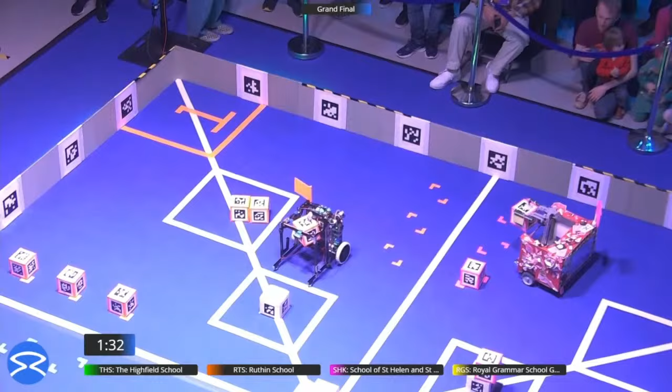That did not transition. Now it did. Fantastic. So that's a lot to do.

Starting from today, you've got about 5-ish months to design your robot. You're going to want to build some kind of rough and ready prototype. You're going to need to build it. The material choice is entirely up to you. You're going to want to style it to make your robot look great.

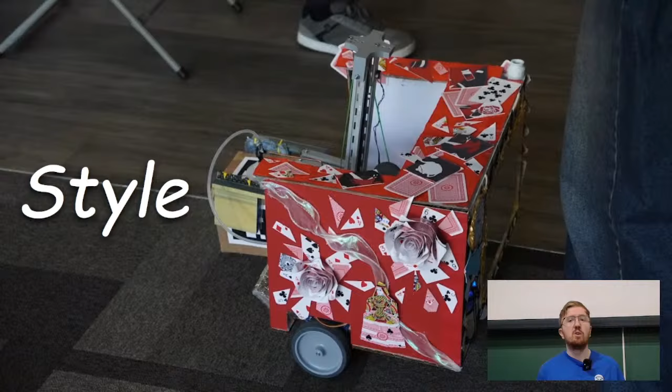Like this one from last year. Yes, that is a mirror on the back of it. You're going to do some electronics, hopefully slightly better than this.

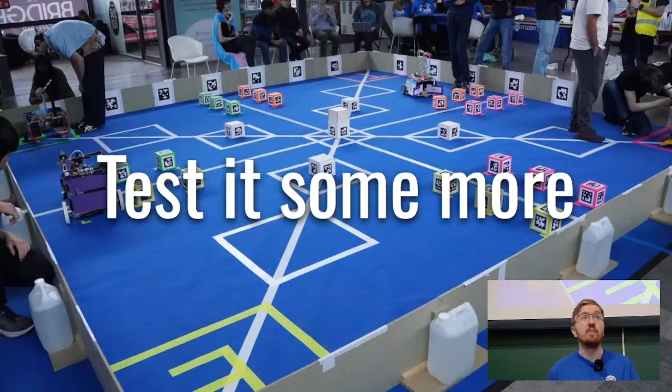You're going to write quite a lot of code. You're going to test your robot, and test it some more, and test it some more. I can't emphasize enough how important testing is. You're going to make some adjustments. Hopefully it won't be using a hammer, but you never know. It won't be perfect first time, and that's okay.

You're going to work as a team. You're going to get your robot inspected. You're going to compete, compete some more, and compete even more. You're going to be doing a lot of competing in a lot of matches throughout the course of this competition.

Your robot is going to meet other robots, and you'll meet other robots. You're going to meet quite a lot of other people. Like I say, there are 30 teams competing this year. You will hopefully score some points, and hopefully win some prizes. Above all else, have fun. This competition is about learning, having fun, and building the best robot, in that order.

So what could your robot look like? We talked a lot about what you have to do. Let's dive into talking about what your robot could do.

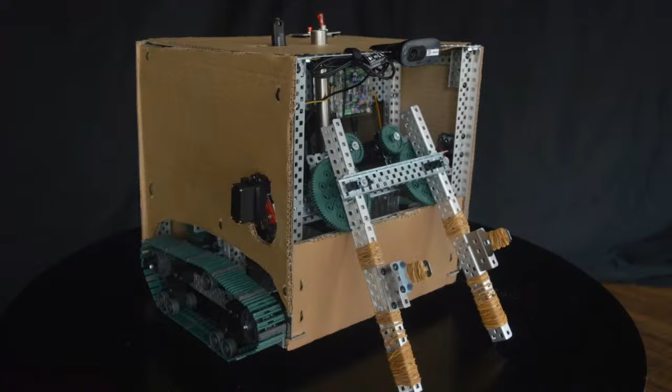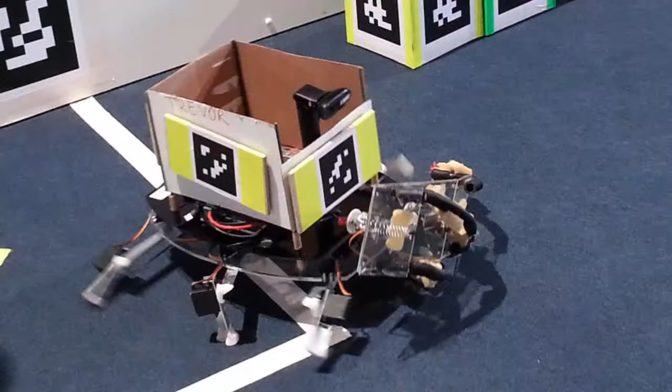The objective is to build a robot, and as many of you know, robots come in lots of different shapes and sizes. Some look like boxes. Some look quite intricate. Some look like that. Some look like cars. Some look like car washes. Some look like spiders. Yes, those are legs. John, I'm sure you're watching. And really anything else. The only limit is your imagination and our rules and health and safety.

So let's talk about a couple of design tips.

Yeah, I don't know what Apple were thinking, really.

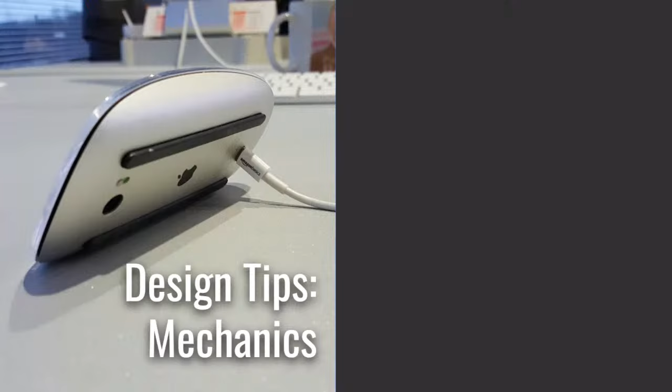I'll give you some tips about your design, hopefully better than a trillion-dollar company. Above all else, read the rulebook for this year. It's incredibly useful. You're going to need to think about how your robot is going to move. Is it going to have wheels or tracks or legs if you're John Bartlett?

If you've got exposed mechanisms, you want to make sure that those aren't going to get caught on anything. Servos are really useful for precise movement, but they're not going to be very good for actually driving unless you're using legs. You can't hold two bits of, say, wood together and hope that they'll magically fuse. You need to think about how that's going to work. Is it going to be glue, nails, screws, things like that?

Robots come in all shapes and sizes, as we've seen, but they still have size constraints in the rules that you're going to need to adhere to. And you can't build things with tools that you don't have access to. If your entire robot is built around a 3D printer and laser cut ply, and you have access to neither, you're not going to be able to build your robot. You are going to need to think about what tools you have available to you, whether that's personally or through your school's design technology department.

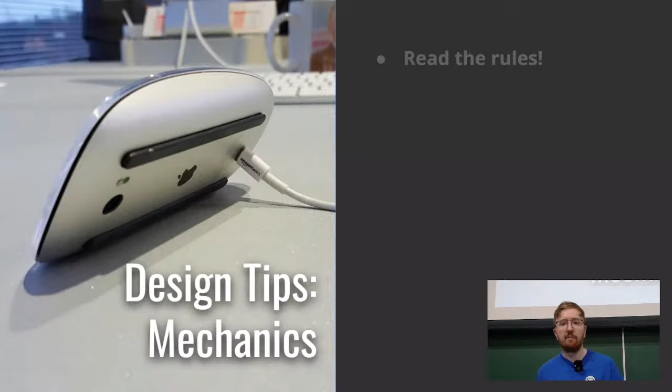Oh, I should have been hitting the button while I was talking. There we go. Autonomous robots need to be aware of their environment.

Like we say, this is an autonomous robotics competition. You press start and then the robot does its thing. There is no additional input. So you're going to need to think about what kinds of sensors you're going to be using, whether that's vision using a camera, whether you've got bump sensors, light gates, potentiometers, rotary encoders, accelerometers, gyroscopes, time of flight sensors, and many, many more. There are lots of different sensors that you can use with our kit. You just need to know how to actually do it. They all have their merits, and you want to make sure you're using them in the right places. But they're not good at everything all of the time. They have different trade-offs.

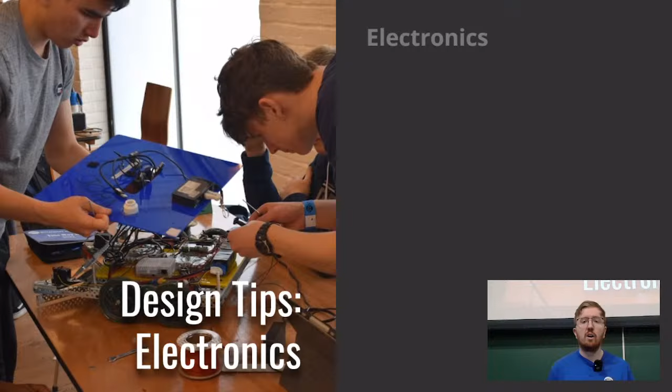So along with sensors, you are going to have some electronics. You're going to need to work out where they actually go. Your robot, you don't really want to just be a spaghetti mess like the picture that we showed earlier. I can say that because I built that robot. You need to think about how you're going to use the sensors. Can you actually interface them with our kit? The answer is probably yes, but you're going to need to work out how. How long should the wires be? How are you going to get power and data between all the different parts of your robot?

You want to make sure that the start and stop button is easily accessible. If your robot is driving across the room as fast as it can, you want to be able to very easily turn it off. Again, yes, I have had to run after a robot and try and kill it.

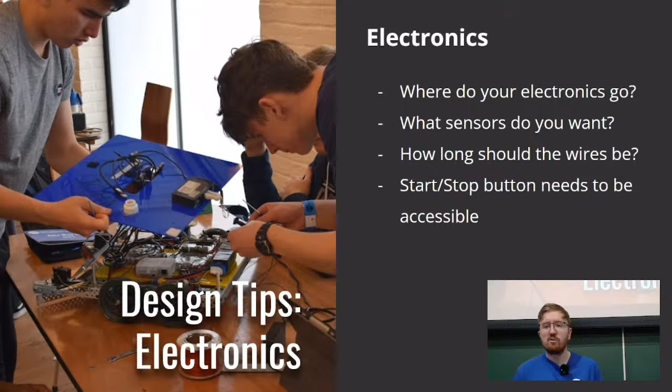You're going to need your USB stick. Your USB stick is going to have your code on it, that's going to be plugged in, but you're going to need to make sure that that is accessible. You're going to have one USB stick for your code and one USB stick, which we'll provide at the competition, which tells your robot which area it's in. And of course, your robot is going to be powered by some kind of battery, and you want to make sure it's protected. More on that later.

So, our super high-end kit. We want to help you out by building your robots as much as we can. We're not sending you in empty-handed. Hopefully you should have received... yes, we're going to give you a kit. It's going to have a lot of useful things in it.

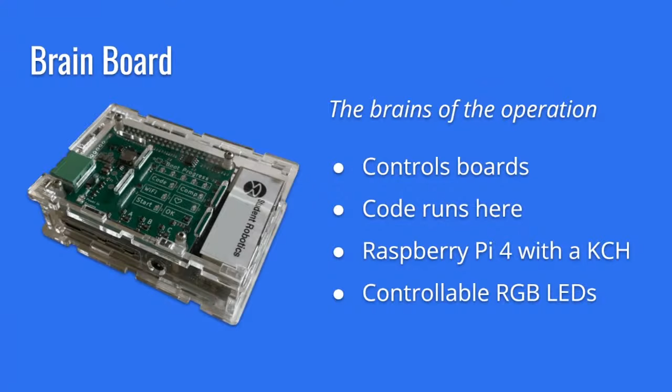The brains of the operation, as it were, is the brain board. It looks very similar to a Raspberry Pi 4, and that's because it is a Raspberry Pi 4. This is where your code runs, and this is what controls all the other components of your kit. There's a little thing on top of it, which we call the KCH, a little hat, which has a bunch of nice fancy LEDs on it. And because it's 2025, some of them are RGB. This can be really useful for debugging and understanding what your code is doing, and also what the robot is doing as it turns on, to work out exactly why something's not working.

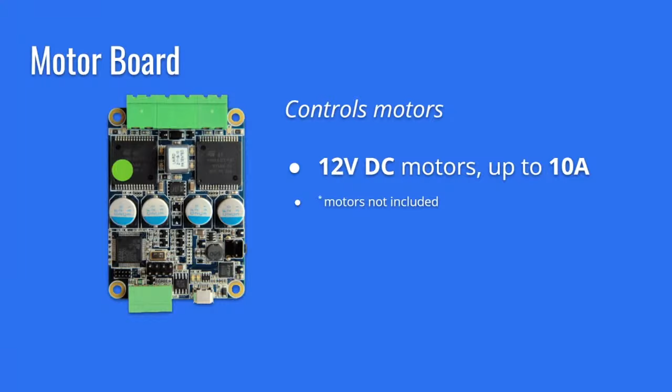The motor board, very aptly named, it controls motors. Each motor board can control up to 2 motors. You get 2 motor boards in your kit, so in total you can control up to 4 motors with our boards. If you want more motors, you'll need to source your own controllers yourselves. There are no motors in the kits. Sourcing those is up to you, but the docs can help you to work out what kinds of motors you need and which ones are good. The motor boards themselves control 12-volt motors, so you will need to buy 12-volt motors. If you put a 5-volt motor into them, they will get very unhappy. The motors will get unhappy. The boards will be fine.

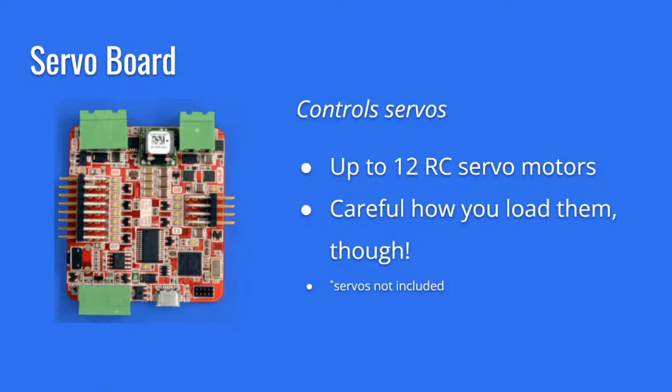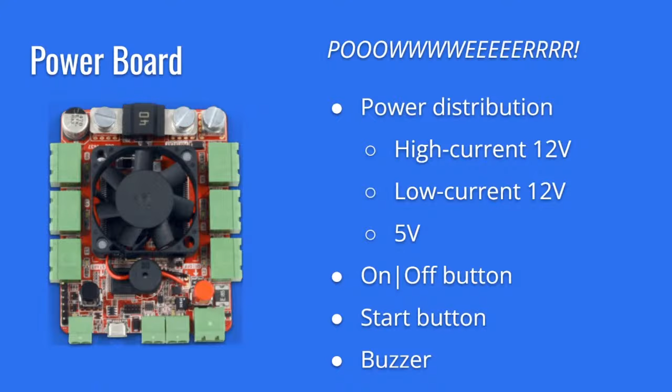Speaking of the battery, it should be treated with respect. They are fairly chunky things, and there is quite a lot of power contained in one. We generally say, as a rule of thumb, the amount of energy contained in a fully charged LiPo battery is about the same as you'll find in a hand grenade. They are incredibly good at powering a robot, but that means if you stab them, they are incredibly good at setting on fire. So don't stab them, so they won't set on fire.

You do not want to connect these batteries to anything other than the power board that we supply and the charger that we supply. They should not be plugged into anything else under any circumstance. If you're unsure and have any questions, please contact us as soon as possible so we can answer them. If you're just interested in batteries and stuff, ask us as well. It isn't just about us being boring.

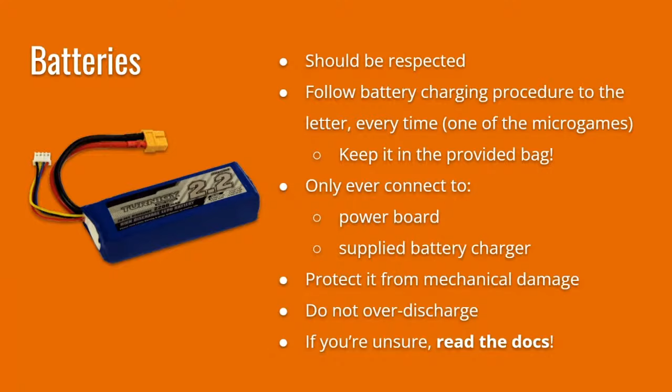On top of the Pi, you will have seen there is a hat. That means the GPIO pins you would generally find on a Pi are not accessible. So instead we provide an Arduino. This provides general purpose I/O, or GPIO, very similar to what you'd find on a Raspberry Pi, but with a few extra benefits. These will do analog, digital, and PWM pins. There are many uses for that kind of I/O. Lots of the sensors I mentioned earlier will need to connect to some of these pins.

We ship them with stock firmware that will nicely talk with the rest of our kit, but if you would like to write completely custom firmware for these, you absolutely can. You can extend our firmware or write your own from scratch, and there is documentation for how to do both on our docs.

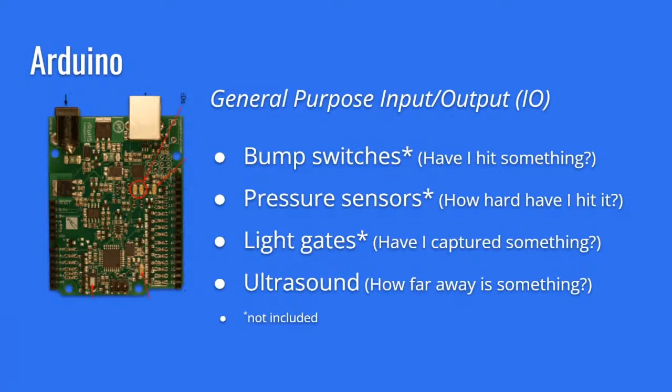If the button works, there we go.

Because of that, and because of the way they work, you can get a lot of positional information from them. Not only can you tell this is this kind of box or this is this part of the arena wall, you can actually use that to work out where you are relative to it. You can work out the type it is, whether you're looking at an arena or a box. You can work out how far from the webcam it is. You can work out the relative angle from your robot. And you can also work out the rotation across various axes.

That is the main thing. They all have their merits and they should all be used in the right places. If you try and do everything with a camera, you're going to have some issues. If you try and do everything with an ultrasound sensor, you're going to have some issues. If you try and do everything with bump sensors, your robot is going to be driving into a lot of walls, which is really funny to watch, but not particularly efficient. Now, each piece of the kit needs to be connected correctly.

This diagram is in the docs, and there is also a helpful video there which walks you through fully how to connect things up. The micro games that we'll be running through for the rest of today will also guide you through how to connect things, why you connect them in that way, and then we will confirm that everything is working as it should be.

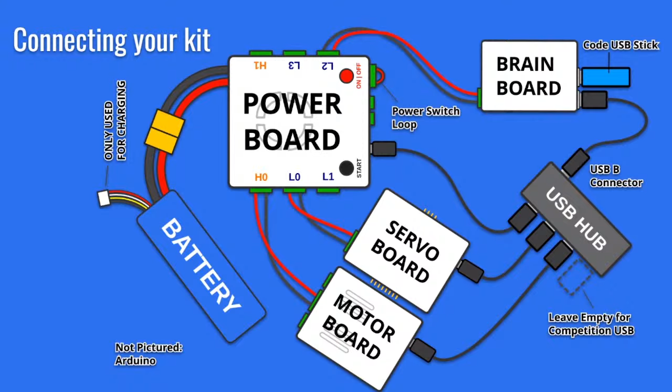Now, these boards need to be securely attached to your robot. You want to make sure that if your robot does hit something, which it will eventually throughout the course of this year, the boards don't come flying off, or in the case of certain teams, it gets knocked and the battery falls out the back. Yes, that's happened multiple times. So you want to make sure that they are mounted securely.

You want to mount the boards with things like screws or Velcro or cable ties. You don't want to just assume they're going to stay there with the power of gravity alone. You don't really want to be using adhesives, hot glue, tape, PVA, Blu Tack, things like that. They gunk up the kit, they're a pain to remove and then put back. You want to use nice removable fixings. Velcro in particular is an amazing one for this kind of thing, or cable ties.

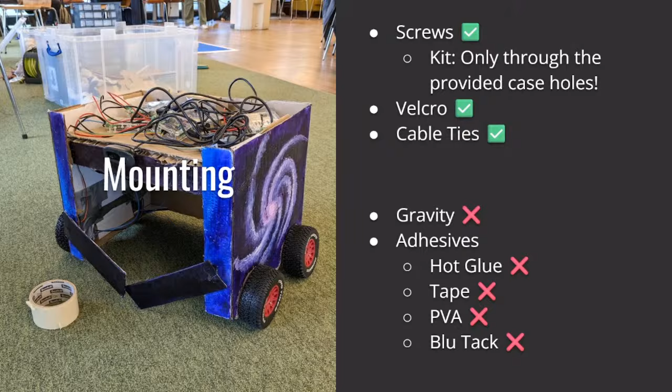Now, we've been doing this quite a while, some of us quite a lot longer than others, and we have some recommendations for how to do that.

The one thing worth noting is start simple. You want to get something moving as soon as possible. And you're going to want to be thinking about a few things: your general strategy, what will your robot do in the game, how's your robot going to sense its environment, and how is it going to be built.

You're going to need to work out, you iterate in little pieces often. You don't want to make huge changes to your robot that's going to take multiple weeks, because then anyone else working on the robot can't do anything for those weeks. You want to make sure you're just always moving forwards and improving, because you haven't got much time. And try not to break things.

And as well, something else I've also mentioned is lots and lots of testing. Now, robots must be safe, realistically above all else. And for that, we're going to be doing a safety inspection. Until your robot passes that safety inspection, it cannot compete.

So you're going to need to be thinking about some things, which are not limited to: how easy is the robot to turn off? If we pick it up, is there a button that's really obvious, which is going to cut all the power? If we pick the robot up, is it going to hurt us or other parts of the arena or yourselves or things like that? Is the wiring messy or loose?

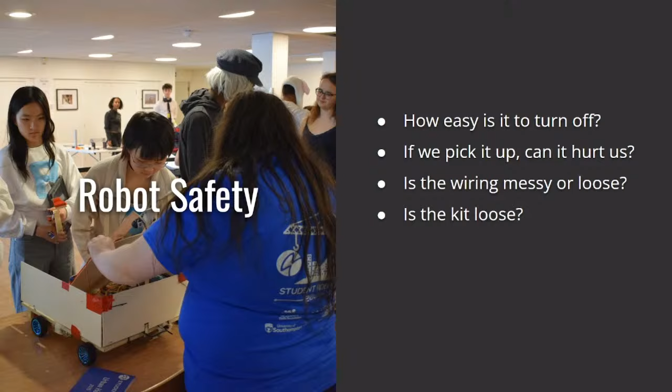Is it sort of a rat's nest to try and debug or understand why something's shorting out? Is the kit loose? If we sort of rattle the robot lightly, does it sound like it's full of nuts and bolts, or is everything nicely tied down properly? And of course, is the battery connected?

All of this is documented on our website. If you come to the competition with an unsafe robot, you will have to fix it before you can do anything, and that's going to be wasting valuable time, so you're going to want to make sure you're considering the rules and regulations as part of designing your robot as early as possible.

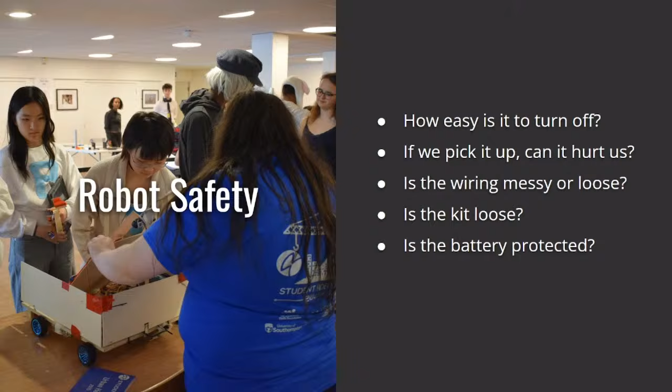Now, as I have mentioned multiple times in the last 20 or so minutes, testing is critical. You need to know how your robot actually performs. There's no good writing some code going, yeah, this will theoretically work, get to the arena and nothing happens. You need to test it. We see time and time again, teams who test their robot more, especially at the competition, almost always do better.

So you want to make sure you have something moving quickly so you can start on that testing as early as possible, because theory is not everything. Now, accurate movement is again pretty important.

You want to stay in lane where you expect. Two motors spinning at the same speed, given the same amount of power, will not turn at the same speed. You will need to account for this in your code to make sure you actually drive in a straight line. If one motor spins faster than another, slow it down a little bit.

You're also going to need to work out when to stop. Are you going to be constantly checking for fiducial markers to work out a distance? Are you going to wait for a specific amount of time? Are you going to use a different sensor to work out once you reach this point, then stop? What happens if that point never hits? Are you just going to spend two minutes driving straight into a wall, waiting until you see a marker? You're going to need to think about some of these things.

You don't just want to turn your motors at full speed all the time. It's great fun seeing a robot drive off as fast as it can across the floor, but it's really hard to control, and it means things happen a lot more quickly. Motor power generally is roughly linear to speed if you squint hard enough. If you halve the amount of power going into a motor, it will spin about half the speed, so it will take about twice as long to move the same distance.

What you're about to do is a complicated challenge by design. It's meant to be difficult, and that's okay. You are not alone. It is okay to ask for help.

A great place to get support is from volunteers or blue shirts, us people in lovely blue t-shirts. A lot of us are ex-competitors. Many, in some cases many years ago, we were sat exactly where you were, listening to someone other than me talk through a bunch of this stuff. Many of us work in industry or academia and have experience in engineering, robotics, software development, all these kinds of things. We pledge to watch the Discord like a hawk. Team leaders and team supervisors can get in contact with us. You can also just message in there, @blue shirts, ask us questions, and we will gladly answer them.

On top of that, there are tech days and challenge days. Again, you can come talk to us in person. If you've got a really complicated challenge and you want to spend an entire day focused on solving that, challenge days and tech days are the best place to do that.

Discord, again, there are loads of blue shirts, and there are also other competitors. Something we loved seeing last year was competitors helping out other competitors. You can talk to other teams, ask questions, get support, ask them what they're doing, see if they've solved the same problem you're already having. So Discord is a fantastic resource for that kind of thing.

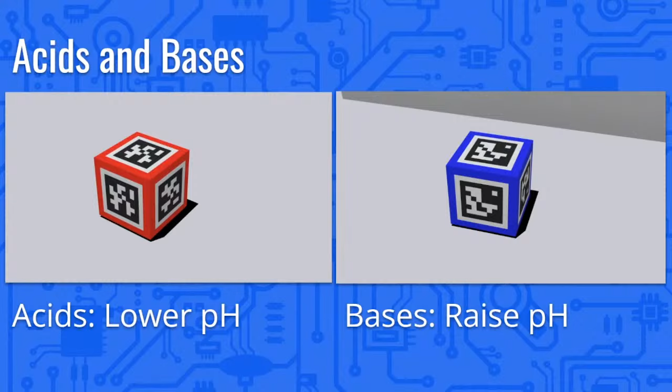Now, what counts as in a lab? This is based on what we like to use, long words in the rules. So the rulebook says it is defined based on its vertical projection, which is basically a fancy way of saying if we look down at it, does it look like it's overlapping part of the lab?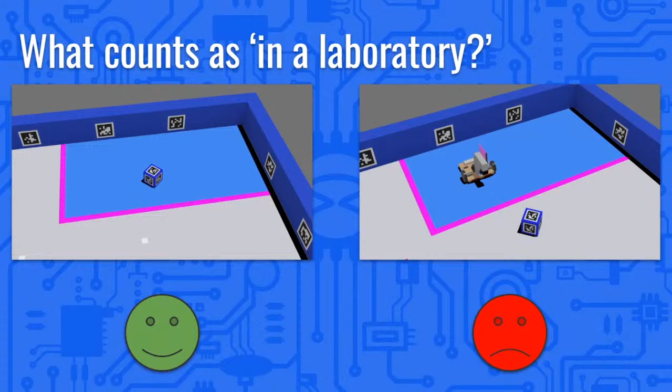If it's slightly over, then we will deal with it - it still counts as in and you'll get the points. Now, half the samples are on the raised area, that is 180 millimeters off the ground, or 18 centimeters for people who can't do 10 times tables. Some of them you'll notice are 45 degrees rotated.

Now, the samples aren't really acidic or basic, because that would be a health and safety nightmare. They are actually cardboard boxes - 130 millimeter single wall cardboard boxes. They have no additional weight; they weigh as much as 130 millimeter single wall cardboard boxes with some faces taped onto it. So, I don't know, 90 grams or so. They weigh basically nothing.

There are a few bonus points additionally available throughout this. You'll get 1 bonus point for having any samples in your lab of any type, and an additional bonus point for at any point throughout the match having left your lab. We will keep track of this, so you don't need to worry about it.

You can move and touch any sample you like, including those in other people's labs. That's completely fine. Sabotaging is 100%, I'd say encouraged - I wouldn't go quite that strong, but it's just really funny to watch. So by all means, do it if you like. You can even put samples in someone else's lab.

That's fine too. Matches last around 150 seconds. That might sound like a lot, but trust me, it's not - 2.5 minutes goes by really, really quick in these matches. So let's walk through a couple of scenarios.

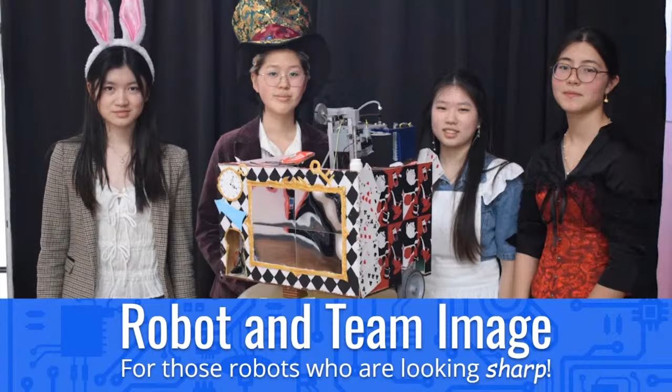Now, some teams like to turn up to the competition in fancy dress, matching either their robot or the game or some other kind of theme. We want to reward that. This is the school of St Helen and St Katharine, an aforementioned rookie team. In this case, they went for an Alice in Wonderland theme, and yes, that is actually a mirror on the back of the robot, like I showed earlier. Surprisingly legal as far as the rules are concerned for some very specific reasons, but that was technically okay. I don't want to go into the specifics, it's complicated.

Now, we encourage everyone to be active on social media, talking about what it is they're doing throughout this year. Whether that's social media, blogging, or yes, even Discord counts towards this award. We want you to be posting about what it is you're doing, how your team and robot are doing. We're going to be engaging with other teams, supporting each other in Discord. This is the award we want to actually reward that kind of engagement. Be sure if you're on social media, hashtag SR2026, so we can see it. We'll likely be engaging with a lot of it.

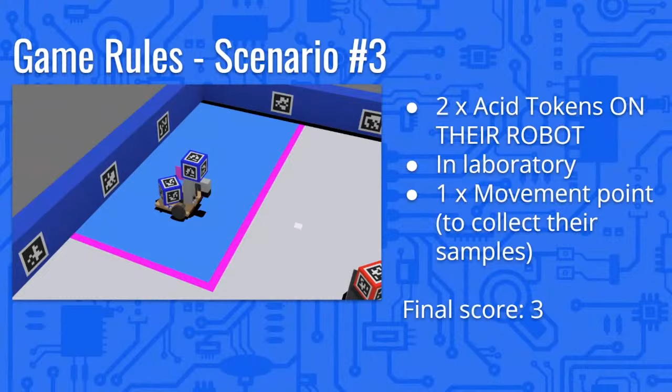I'm just going to say yes, you can, on the understanding that if it's in the robot, it's not worth any points - it only matters where it finishes. If rather than sat on a robot it was in the robot, that would still be fine because the vertical projection is in your lab. If it's in your robot but not in your lab, it's not worth any points. Worse still, if it's in your robot in someone else's lab, it gives them the points, not you. So you've got to be careful of that one. But yes, if you want to absorb them to move around more easily, that's fine too - if you want to try to carry 4 or 5 at once, that's absolutely fine.

Would a box that's connected to the robot be considered part of the robot and then go over the size limit? No. If your robot is carrying a sample, it is your robot carrying a sample. The sample isn't part of your robot, in the same way that if I hold this keyboard, I'm not part of the computer. The extent rules are designed for your robot itself, not the continuous structure that is connected to your robot.

How high is the platform in the middle? The platform in the middle is 180 millimeters high. It is, I want to say, 1.2 meters squared, but the diagrams here are screenshots of the simulator. There's a nice top-down, to-scale, measured image in the rulebook that has exact measurements for things and tolerances, so that's where you can get all those details. But yeah, it's 180 mil high and I think about 1.2 meters squared.

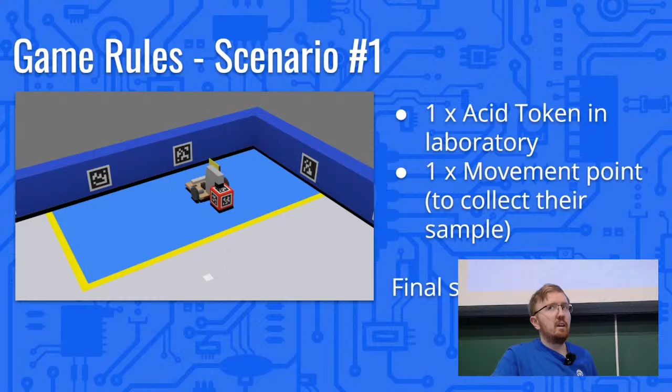Bit of both. Because it's a Pi, it runs Linux, it has a clock. It's not a real-time clock. We have seen in some cases with lower battery, CPU runs slower, time drifts. But in theory, for some level of precision, you can ask what the current time is and get a number. It'll probably be somewhere in 2014, but it'll be a number. And if you wait a second, that number will be one bigger than it was.

So you can't necessarily tell what the time is, but you can tell how much time has passed, which is generally what you want. I forget if there's an attribute on the robot for when the start button was pressed. If not, you can store one yourself and calculate from that. We've seen quite a lot of teams adapt their strategy based on how much time they have left in a match, and that's a really good way of doing things.

Last couple of questions? One online: we've not received our kit yet, despite paying for the transport. Can you give us some idea of a delivery date?

The one thing I'll emphasize is if you've sent us money, it has not been lost in the void. We have got it, we probably have record of it. There are some internal logistical challenges which I'm not going to get into, but basically things are delayed. We're hoping to get them dispatched in the next week and a half-ish, but as soon as we're ready we will let you know and dispatch them directly. If you've paid, that's fine. If you haven't yet, now's the perfect time, so we can get all the kits dispatched in one wave and you'll get them sooner.

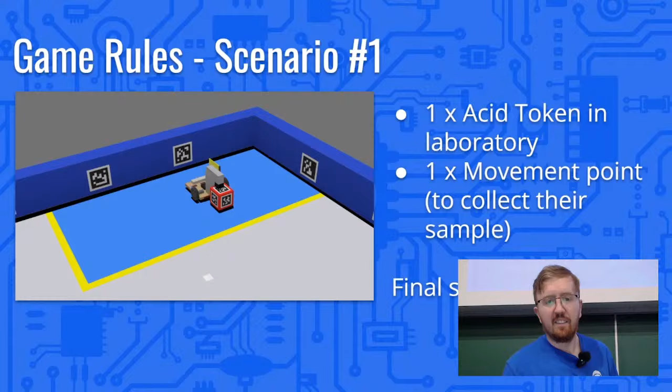If a battery overheats, it should do nothing but get hot. We have had one case where a robot did suddenly start smoking in an arena, that was last year. That was terrifying. Some wires shorted, melted some electrical tape. It wasn't that bad. Realistically, nothing about this event is going to be any different.

If a thing catches fire, follow fire precautions. Leave the building by the nearest fire exit. Go to the fire assembly point. Team supervisors will make sure they've got everyone. We'll make sure the building's empty. All the normal things. We did have, a couple of years ago, a point where we had to pause the competition for a bit. We will just adjust the schedules to make things work out. In general, common sense health and safety things apply to our event as much as they do any other event.